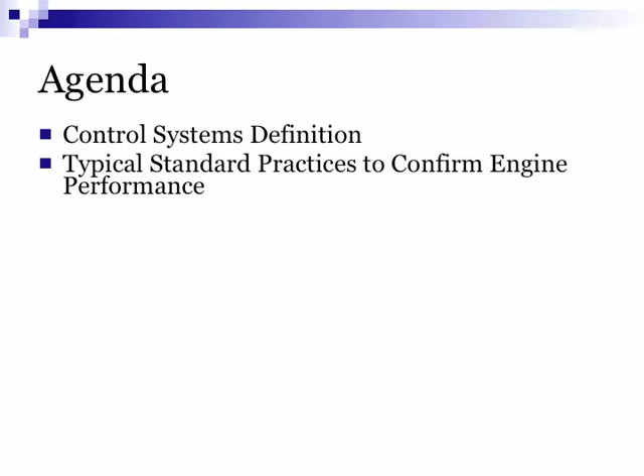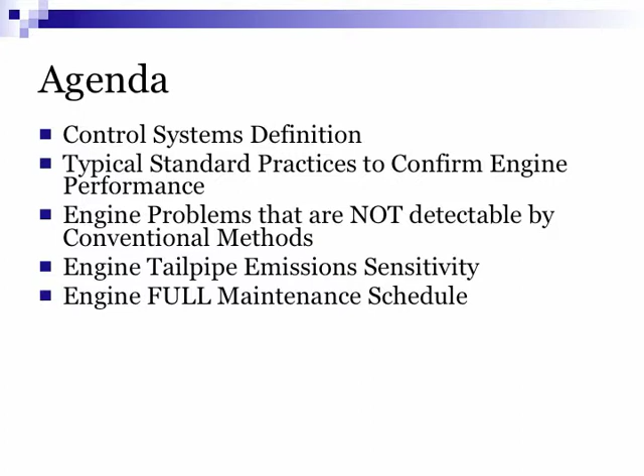The presentation will cover 8 important areas of interest: control systems definition, the typical standard practices used to confirm the engine's performance, engine problems not detectable by conventional methods used in most repair facilities or by the truck operator, engine tailpipe emission sensitivity, how minor engine changes can drastically affect emissions output, and engine full maintenance schedule so you can confirm that your fleet is meeting the standards required by the DPF.

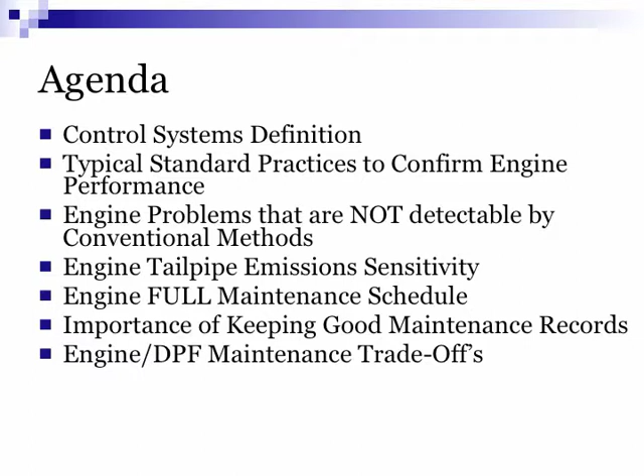In addition, we will discuss the importance of keeping good maintenance records. We will debate which maintenance items should be added or taken away to adjust your fleet-specific needs. And finally, we will inform you of the services that Emission Services Unlimited Incorporated performs.

Over the past few years, since the introduction of retrofit diesel particulate filters, most fleet owners, operators, or mechanics have tried to separate the DPF from the engine. Essentially, they have treated the DPF as a foreign item on the truck. By doing so, the engine is treated as one complete system, and the DPF is treated as another control system.

We must now begin to treat the engine and DPF as one control system. When we begin this thought process, it becomes much easier to diagnose the root cause of any DPF or engine issue. Many perceive the DPF as being problematic due to frequent onboard diagnostic lights illuminating.

However, we must remember that prior to the retrofit DPF, we relied on the truck OBD or service engine soon light. Now the DPF has become the canary in the mine shaft. The DPF is much better at detecting engine problems than the old service engine soon light was.

This is due to the fact that almost every engine problem or slight wear of the engine will increase tailpipe emissions. The DPF is now capturing all of those tailpipe emissions by the nature of its operation.

It is important to point out that the most difficult part in being a retrofit emissions installer is determining the correct DPF for the application of interest. There are many makes, models, and types of DPFs available in the retrofit world these days.

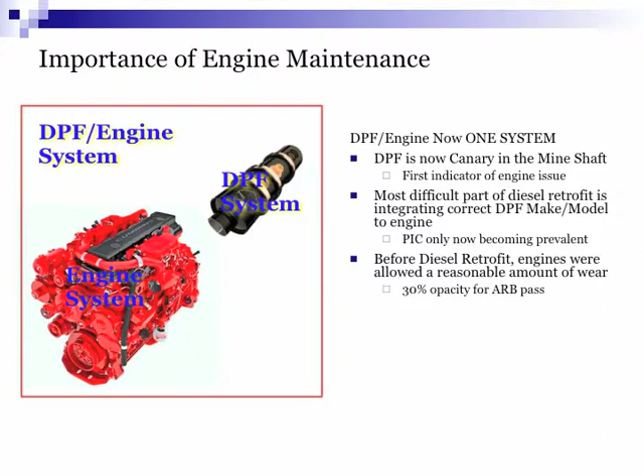What we are trying to point out is that it is very difficult and important to verify the excellent condition of the engine and to determine which DPF model is the best candidate to create one efficient system that will function correctly through the daily operation of your diesel engine.

There are typically 3 types of maintenance practices: proactive, preventative, and reactive. Most fleets operate with a combination of all 3 practices. Proactive is the top choice as it predicts when problems will occur and gives the fleet owner the most life of all engine and diesel particulate filter components, in addition to avoiding unscheduled downtime.

Preventative maintenance consists of scheduled downtime. However, components such as oil, air, and fuel filters may not be used to their fullest potential as they are changed on a set schedule that is based on hours, miles, or days.

Reactive is generally the last choice for maintenance practice. Using reactive maintenance, all downtime would be unscheduled as components are replaced or repaired at the time of damage or failure. It is important to discuss the types of standard maintenance practices to determine which type of maintenance your fleet performs.

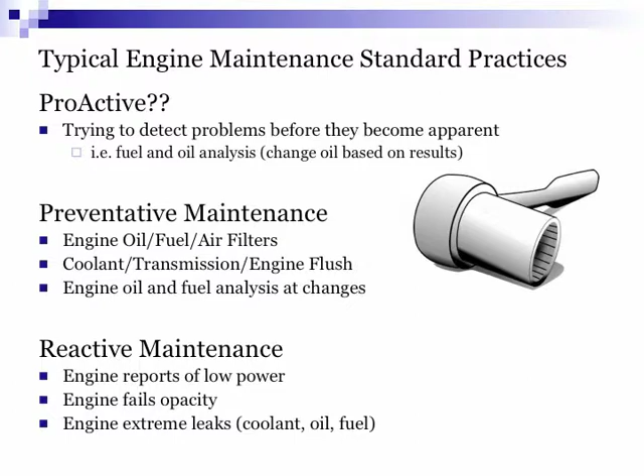There are various ways to approach DPF and engine maintenance that works best for your current way of doing business. For example, if you are primarily performing reactive maintenance, you would want to make sure you are operating a diesel particulate filter with a high tolerance for catastrophic failure. DPF cores are very expensive and can be extremely sensitive to engine issues. A leaking fuel injector can cause permanent and irreversible damage to a cordierite material core, whereas a silicon carbide core is nearly indestructible. Keep in mind the silicon carbide core may also have a higher upfront cost.

Regardless of the type of maintenance practices you perform, there are many engine issues that are extremely difficult to detect, and may only be possible to do so in a sophisticated lab environment or with use of a dynamometer. Some examples are fuel injectors, valve wear or adjustment, turbocharger boost pressure, or piston ring wear. Even if you use engine ECU software such as Caterpillar Electronic Technician or Cummins INSITE, you may still not be capable of detecting some of these issues.

Let's consider a bad fuel injector to discuss this further. Some of the common ways to detect a bad fuel injector are by monitoring the exhaust temperature of each exhaust manifold while the engine is operating, or by performing a cylinder cutout test. However, this is usually completed at engine idle speeds, unless you are fortunate enough to have access to a dynamometer to test at full load rated speed or other specific speed load points.

Fuel injectors may not display a problem until the engine is operating at high load conditions. This is especially true for engines with a high pressure common rail injection system. A bad fuel injector may also simply have a seating problem that allows fuel to drip into the combustion chamber while the engine is off. This would lead to high smoke at startup.

However, with a DPF installed, black smoke is no longer visible and there is no way to detect this. It is also important to note that for high-pressure common rail engines, many times when the fuel injector begins to go bad, it leads to overfueling. This overfueling will actually increase the engine horsepower, so you will rarely hear a complaint from the vehicle operator.

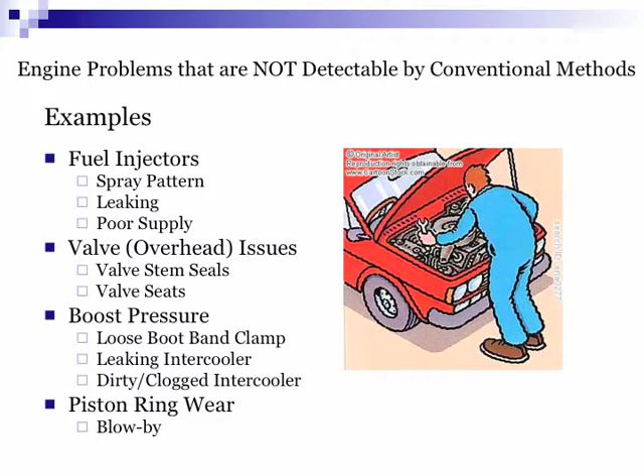Before the installation of your DPF, some of these replacement items were probably not a major concern, at least until the engine became a gross polluter or began to lose power. But again, we have to keep in mind that changes in tailpipe emission occur much before the point of power loss.

Now I would like to talk about engine tailpipe emission sensitivity and the difficulties that engine manufacturers have had in meeting the continually increasing ARB and EPA standards. When we look at a 2005 on-highway heavy-duty diesel engine as an example, the regulation for soot is 0.1 grams per horsepower hour, and the regulation for NOx is 2.5 grams per horsepower hour. In order for the engine manufacturers to meet these incredibly low emission standards, it required the introduction of various technologies.

Some of these technologies include EGR valves to control the combustion temperature, multiple fuel injections per piston stroke, extreme high fuel pressures to accommodate those multiple injections per stroke, various ways to atomize fuel, variable geometry turbochargers to maintain the correct intake manifold pressure, wastegating the optimal amount of exhaust gas, and the list goes on. The recipe that these engine manufacturers have introduced pushes the engine to the very limit of the least amount of emissions it can possibly produce without having a DPF.

What we want you to understand is that any microscopic change to your engine that affects the combustion chamber can easily double or even triple the extreme low emissions that the engine is producing, as they are so small already.

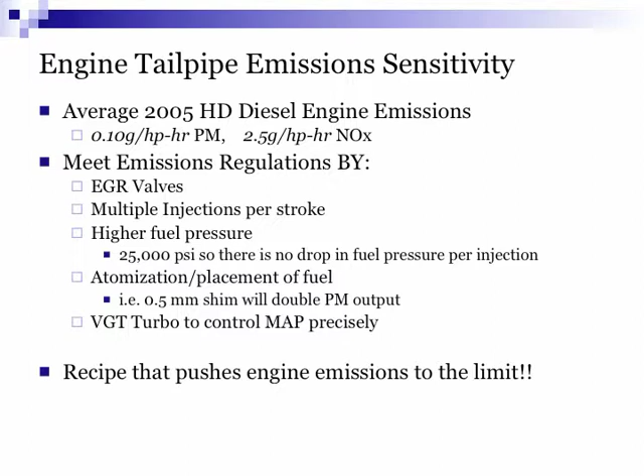I would like to spend a little more time on this subject to make sure everyone understands engine tailpipe emission sensitivity. I have seen many examples of engine complaints of power loss and also the test results that followed. Many cases have shown that by the time the vehicle operator makes a complaint of power loss, the engine opacity results can be between 40 and 60%. This is an extreme gross engine polluter when you compare this to a like-new engine producing approximately 5% opacity.

Now, if we assume that the engine, when in like-new condition, is producing 0.1 grams per horsepower hour of soot, which is the EPA regulation for 1994 to 2006 diesel engines, then by making some generalizations and interpolating to the 60% opacity result, we can assume this gross polluting engine is producing 1.2 grams per horsepower hour of soot.

This is 12 times the limit for most DPF models. Many of these engine power issues arise from worn components. We must keep in mind that wear takes place over a long period of time. By the time the soot output reached 12 times over the DPF limit, it must have passed through 11 times, 10 times, 9 times, etc. All the while, the DPF would have suffered from poor performance.

The point I am trying to make is that it is important to not wait to perform engine service or repair until the engine is suffering severe problems. As we mentioned previously in this presentation, many DPF models are extremely sensitive to catastrophic failure and are also extremely expensive to replace.

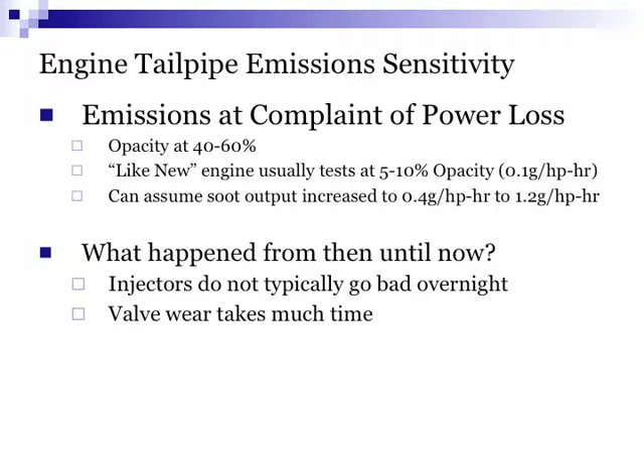required engine services were performed. Second, the engine manufacturer has determined the optimal time to service the engine components through years of field and lab testing. The guidelines they put forth are good estimates for you to base your PM schedule. However, it is also important to note that if you operate under harsh conditions, you may want to increase the service interval even compared to the OEM recommendations, or consider using other proactive methods.

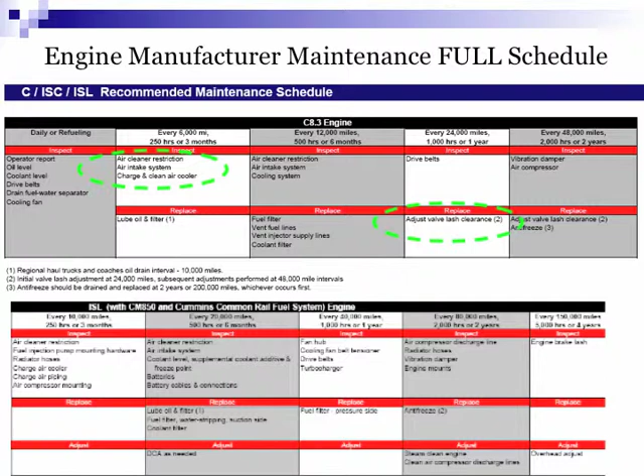We highly recommend that you incorporate the maintenance schedule for each engine model contained in your fleet into your existing PM schedule. Equally as important as performing proper engine maintenance is keeping excellent records of the services or repairs you have performed. You have probably experienced an issue where you had a DPF service and the emissions technician told you something like, "Your engine is not running properly and you will need to fix your engine."

Whether or not the engine is the root cause of the problem, it is important to know that the DPF manufacturer will put the burden of proof of engine maintenance and keeping the engine running in like-new condition on the end user. You may find this information in the warranty obligations in your DPF owner's manual. Being able to access and provide the emissions technician or DPF manufacturer with these records will take the liability off of the end user and back to the DPF manufacturer.

Most importantly, these records will speed up the warranty process tremendously and put the DPF end user in a very solid position for warranty approval.

Another aspect of proper record keeping is for DPF trend analysis, which actually can help with engine trend analysis. Both of these items are crucial in determining trends for common part failures, DPF cleaning schedules, and engine maintenance item adjustment. For example, not all DPFs will be able to go 1 year between filter cleanings as indicated in the DPF owner's manual. In fact, if you refer to your DPF owner's manual, it will generally read something similar to, "The DPF will go up to 1 year between soot and ash cleaning."

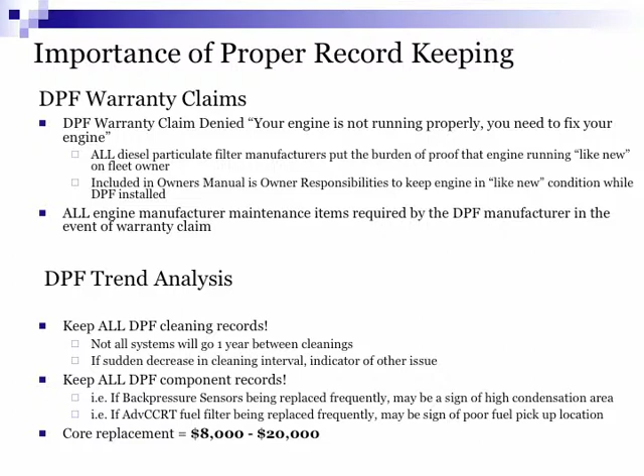The same mentality can be used for the fuel filter example. If trend analysis indicates that fuel filters are being replaced very frequently, it may indicate that the fuel pickup location has dirt or other foreign material entry.

We understand that in the current state of the economy, your facility may be suffering from a lack of resources to work towards the proactive type of maintenance we would all like to complete. There are many factors that impact this ability, such as a shortage of qualified technicians, tools and software to perform proper diagnostics or repairs, a shortage in the budget, and the immense amount of training required for your shop technicians or operators to accurately service and operate the engine and DPF.

Therefore, we understand there will have to be trade-offs between what you have the ability to service and what you can financially afford to complete. That being said, it is important to understand that many DPF services can and really should be performed when your vehicle is undergoing its common A, B, C, or D PM schedule. This can save much time and money. You may also have to determine which services are most important and less important.

As I mentioned earlier, if you are operating a DPF with a silicon carbide core, permanent damage to the core is almost impossible. With these applications, you may be able to choose to do less costly engine service while completing more DPF service. This is simply because the DPF can handle higher soot loading and other emissions constituents that other DPF cores may not be able to handle.

What we are trying to point out is that it is possible to operate an efficient fleet with minimal downtime, even on a shoestring budget, or due to other factors that will mesh well with your current business practices.